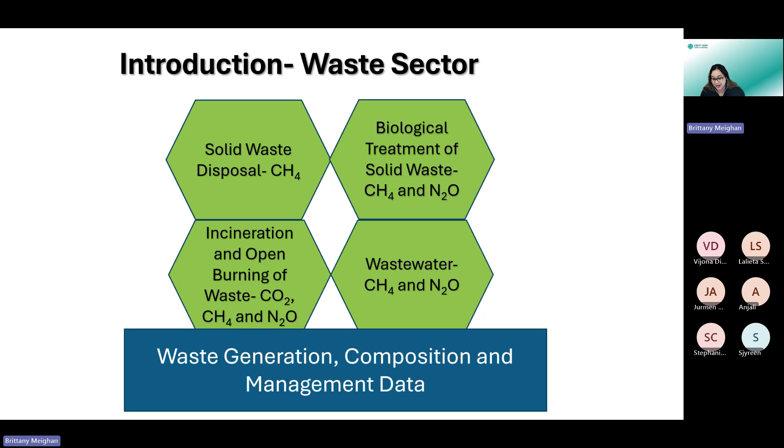categories. So there's solid waste disposal, which you have mainly methane emissions, CH4. You have the biological treatment of solid waste, which give you CH4 and N2O, nitrous oxide. You have incineration and open burning of waste, and you have wastewater, right? And then within these, you also have industrial solid waste and industrial wastewater as well. And so from these main categories, the main types of data will be waste generation data, the composition of the waste, and then the management data. And so we'll take a look at these in a little while.

And broadly, when we're looking at the waste sector, the main gases that are emitted include CO2, so carbon dioxide, methane, and N2O emissions. And so these are coming mainly from solid waste disposal, biological treatment of solid waste, incineration and open burning of solid waste. That's where you get a lot of the CO2 emissions, and then wastewater treatment and discharge, so both domestic and industrial. And so typically, methane emissions from solid waste disposal sites are the largest source in the waste sector, typically because as the population grows, the amount of waste per capita increases, and so this produces an annual increase of CH4 emissions.

And also some notes here that biogenic CO2 emissions are not included in the waste sector. And what this means is emissions that are coming from facilities where you might have capture of gases, of CO2 gases. These would not be included in the waste sector. So only those that are coming from the typical waste activities.

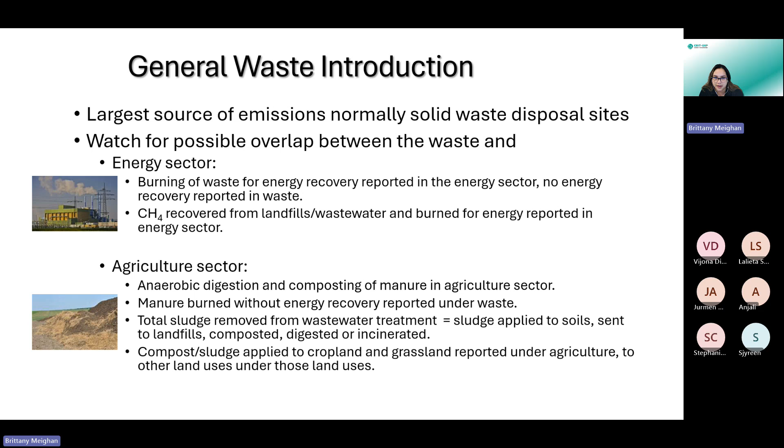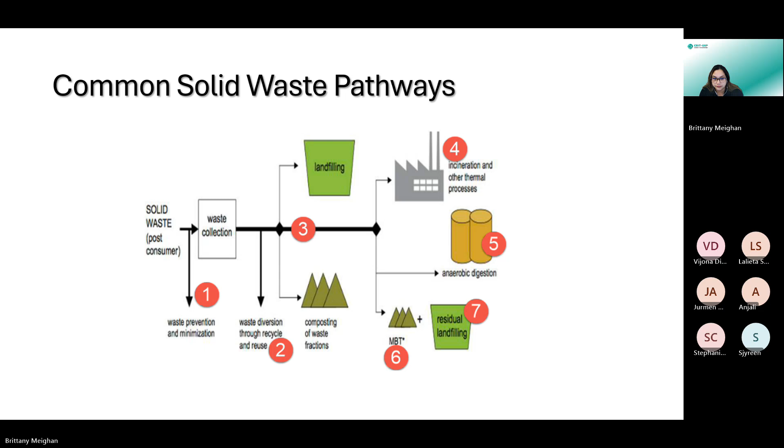So this says it's like a 1, 2, 3, 4, 5 process, but really it could be that it stops here at the landfill, or it stops here at the landfill, or most things in certain municipalities go directly to open burning, for example, maybe in some rural areas. And depending on how advanced the waste treatment and facilities are in the country, they can go as far as 6 and 7. But those are all the possible pathways.

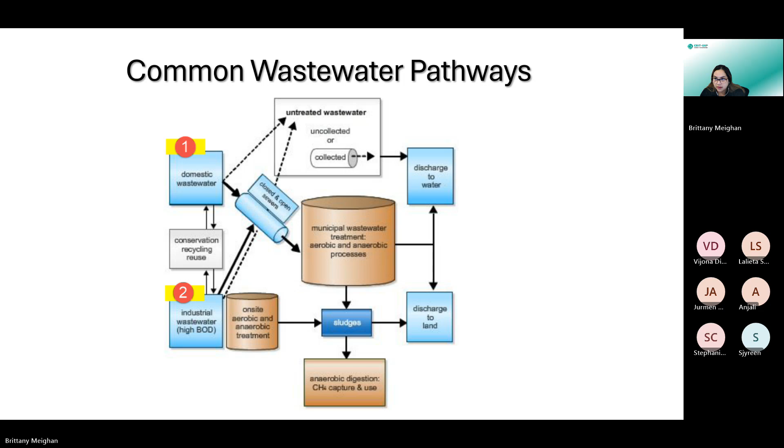And you might have some of that sludge discharged to land, and some portion that's then taken into an anaerobic digestion, for example. In some cases, you might also have treatment where it's treated in the facility and then goes to discharge into open body of water as well. The option isn't necessarily here, but that's a common pathway as well. Once it's treated, it can then be discharged into a natural body of water. Okay.

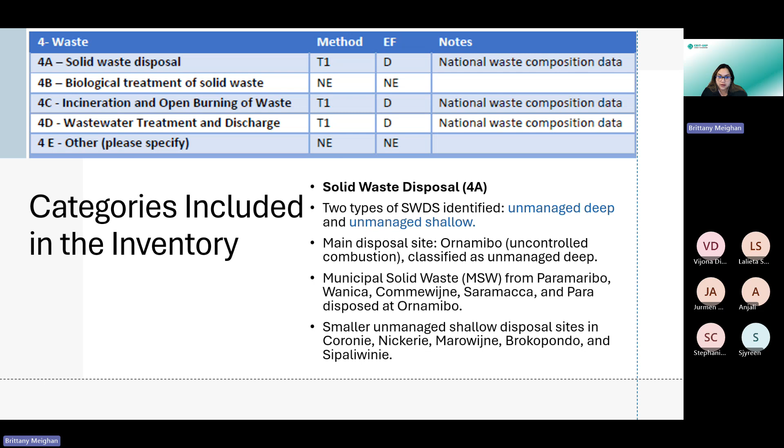Yes, Anjali. Yeah, I don't think anybody is collecting data on the sewage water. I think maybe Bureau of Public Health has some data about the quality of water when they do certain checks. Stephanie can correct me, but overall we don't know the amount of sewage water that's going into our oceans. I don't think, but you guys can correct me, Lalieta.

We don't have a centralized system, no. Not like a developed country. Our system is just everything goes into an open canal or some open river or something. That's the household wastewater, right? Toilet water, sewage. It just goes into the open creeks and goes wherever. It's not really treated. We don't have a centralized system for that.

Sorry, go ahead, may I add, Lalieta. Indeed, we do not have a centralized system for wastewater collection and treatment. However, there is some improvement. There are some companies who are treating their wastewater and having that tested regularly. But we do understand that's not information they always share or are required to share or report. If you wanted that information, you'd have to ask directly to those companies, and that can be a challenge, because it's always considered confidential.

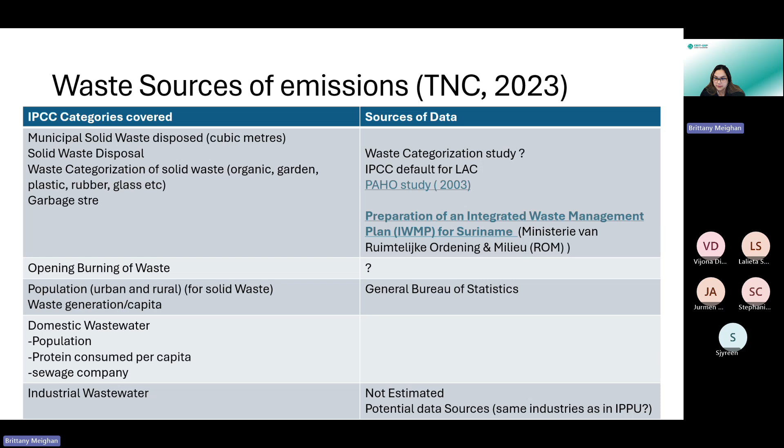Okay, so now let's look at some of the main data. We've already been talking about the data, but how it looks.

Brittany, if I can interject, I'm not sure I can open the links. I can't even copy it. Let me see if I can, maybe it's only me. Copy paste, maybe Control C will help. Control C works, but when I paste the link, I don't get a website, it's not recognized. Sure, give me one second, I will tell you if this works. Try copy and pasting those two instead. Yes, this one works, thank you. And I sent the link for the other one.

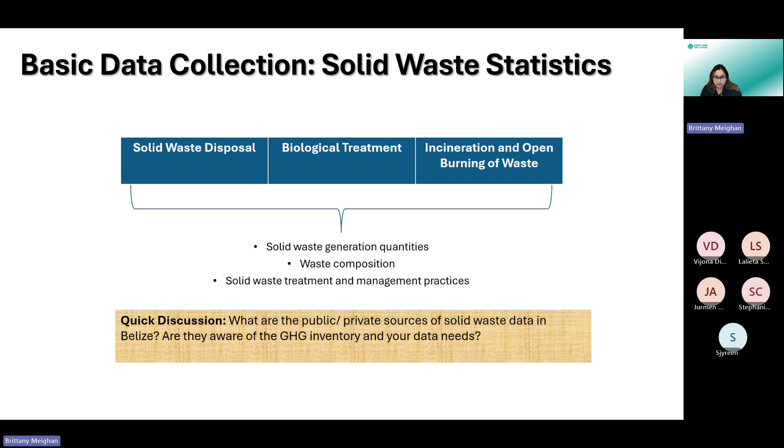But when we're looking at municipal solid waste activity data, we're looking at the total municipal solid waste generated and the fractions that are disposed. So try to zoom in.

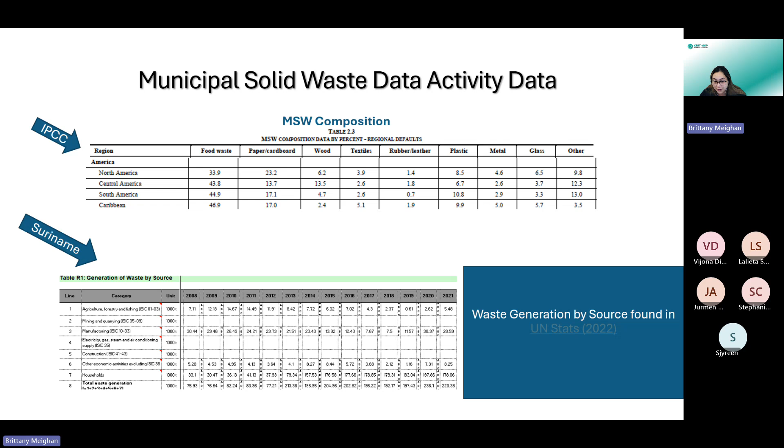Yeah, sure, that's a very good question. I think once we have time at the end of the session, we can probably pull up some of the equations. I would just need to make sure I find them and put them back in this presentation. Good question, I didn't realize that for the 2-hour sessions there are various equations, so I was trying to see what we could fit into the session at a time. But we can always go back to them.

So industrial solid waste, I think we've spoken at large about this already. You already know what your industries are in your country. So apart from knowing what wastewater they're producing, if they have a specific type of industrial solid waste, this wasn't included in your last inventory. But you need to also know the fraction of industrial waste that goes to landfills.

I saw in the chat that Anjali sent, she sent for at least one industry what industrial waste is produced from some company, and what percentage or how much of that is going to a landfill. So that's good information already. You'll also need to know if there's any incineration and compost occurring. And you can also do this by using surveys on waste generation and composition at these industries, or they can do these surveys, which would be ideal.

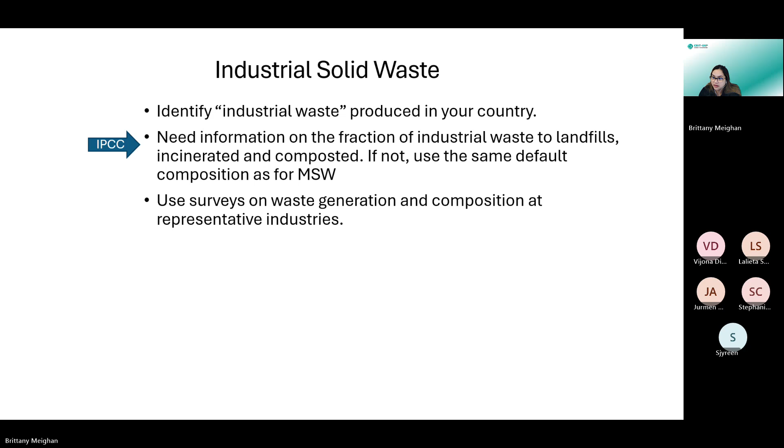And so then this is categorized as other waste. This wasn't included in your last greenhouse gas inventory, but other waste is defined by clinical waste, hazardous waste, agricultural waste. And so this includes things like plastic syringes, animal tissues, bandages, etc., things that are generally coming from a hospital. So this waste is usually incinerated, but sometimes may be disposed at the solid waste disposal site. Generally, it's a small contribution to emissions.

There's also hazardous waste. So I think we spoke a little bit about, for example, the waste oils, if you have waste solvents, ash, things like this, which are hazardous in nature. Maybe there's some other type of hazardous waste that's coming from the other big industries. So generally these are separated from other waste streams and also are a small contribution to emissions. So you already know that you have waste oil, at least from some companies. This could be, you can account for emissions from that, although it would be very small.

And then if you have this, I don't know if you do, but for agricultural other waste in the waste sector, this would include the manure management and burning of agricultural residues, but these are reported under the agriculture sector. So unless you have other waste that's taken to a municipal solid waste site, then it would be included in the waste sector.

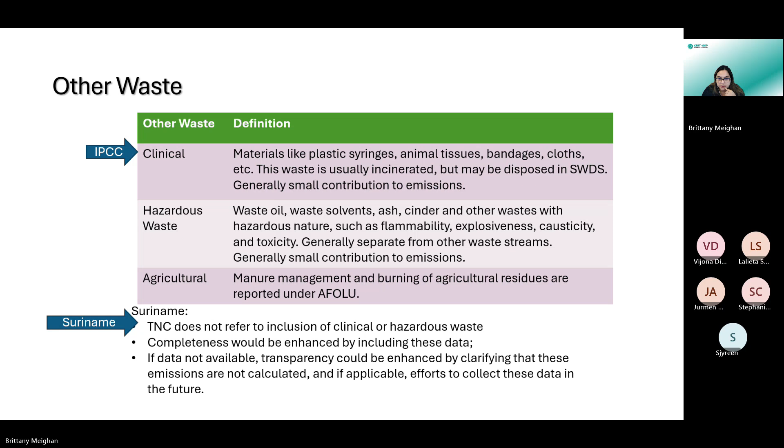But I think we're getting there. You're getting there, and there'll be questions no matter how long you do this type of work. So don't worry too much.

Okay, let's take a look into wastewater. This is for domestic wastewater. Here the first step is to estimate the total amount of organically degradable carbon in water. The data that you need here is country population, and then also the country-specific biological oxygen demand per capita. This is in grams per person per day.

Sometimes the statistics department or the environment department has studies on this, or maybe the waste company has studies on this, but because you don't have a centralized wastewater treatment, you can also use the IPCC default for this biological oxygen demand. So this is how much load you have on your water, basically how much oxygen it needs to decompose. Okay.

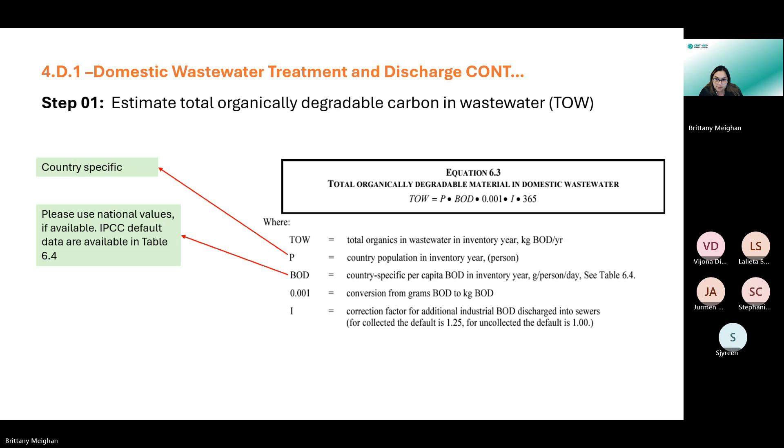Now you also have a correction factor. So this correction factor is for other industrial biological oxygen demand, BOD, discharge into sewers. We don't have this situation here in your country. It might be the same way. If you don't have a centralized system, perhaps your industrial wastewater is also going either into a septic tank or in some cases into a pond, right?

But this is just an example of how the data would look like. But the main data that you would need to worry about is your country population here. And this is for your domestic wastewater. And as you can see here, you have defaults here. This default here is for Asia, Middle East, etc., and Latin America. It says it's a value that's used for various regions. And then I think there might be one specific for the Caribbean, but if not, this would be the most relevant one to use.

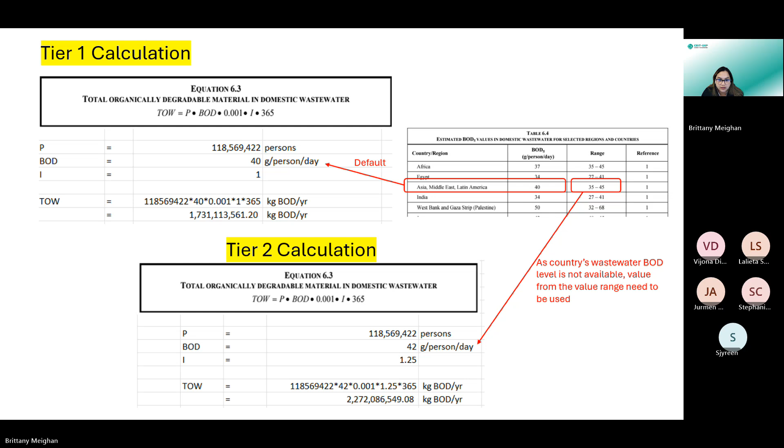Okay, so then once you have your total organic degradable material in your domestic wastewater, then we can look at how much emissions result from this. So in this case, this is how much CH4 emissions. And there are lots of different steps as you go along, but when you're using the IPCC software, it gives you a stepwise approach. The main ones that you'll need, of course, is your population data. And then these other factors here, for example, your organic component removed in sludge. If this information is not available in country, you use the default. Same as for the fraction of population and income group.

So this would be a good one if you have, for example, rural versus your population in your big cities. There are different factors that are used by income group. So if you have your population data that's split up by income group, so high income, medium, and low, then it assumes that you have different treatment systems for the different population. And it's just like rural, urban high income, and urban low income, right? So this is I. And then also the type of information you'll need is the treatment system or discharge pathway. So this is J.

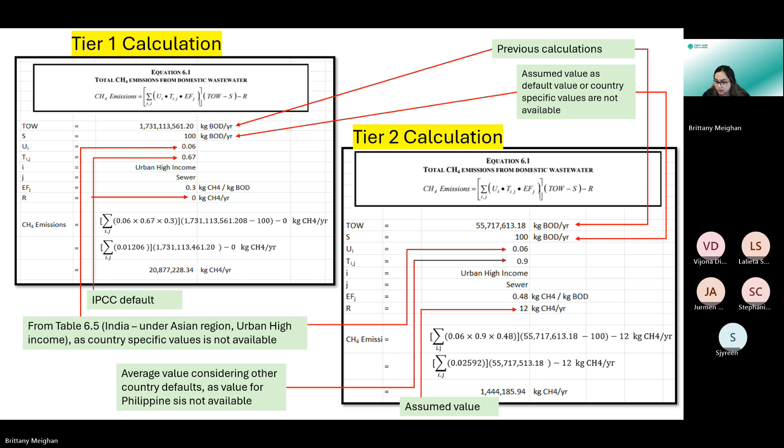Okay, so we just finished wastewater treatment and discharge. In summary, of course, it can go much more into details. We looked at equations for CH4. There are also equations for N2O, nitrous oxide. But the data requirements are basically the same. What changes would be the emission factors, right?

One moment, colleagues.